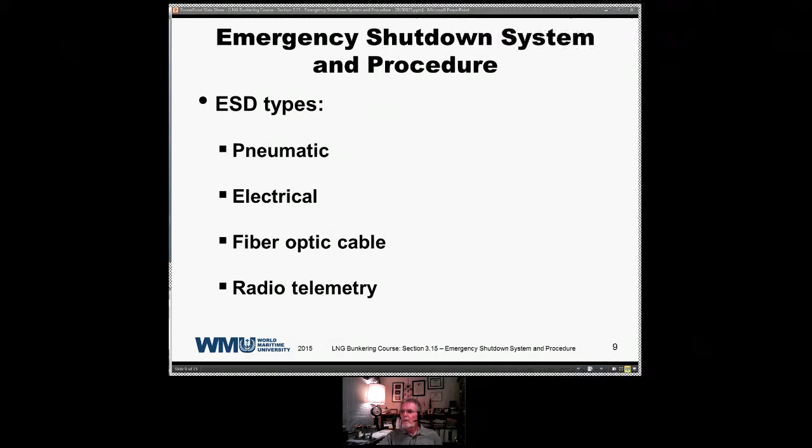Radio telemetry. And we'll explain these as we go along. An ESD can be initiated, as I said, by any out-of-range operating parameter, and this results in a controlled shutdown, placing it in safe mode. This would be the most common type of ESD of the ESDs that are generated.

As I mentioned, very rarely have I seen an actual emergency condition, what would be considered an emergency situation, that would generate an emergency shutdown. Fire being one of those examples, a true emergency situation.

An ESD should and will be initiated by the following emergencies. Again, we use this term in a very, very loose manner, but emergencies are one thing, out of operating parameters are another.

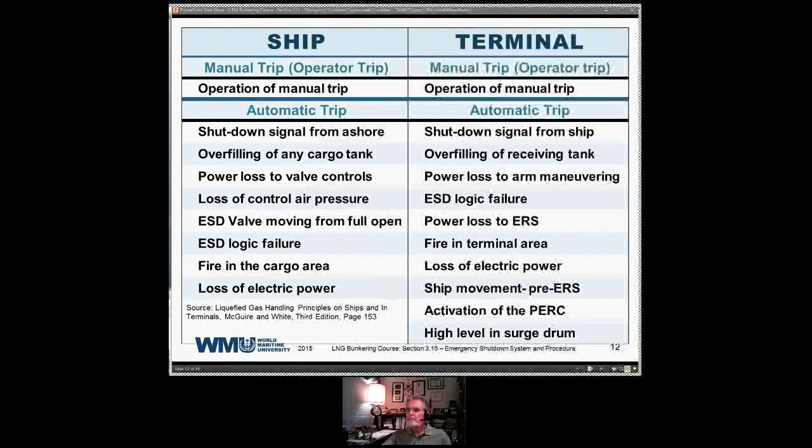The ESD should initiate the following immediate actions. On board, the ship sends out the shutdown signal to shore, so you get the shutdown on shore, and vice versa on the terminal, if the signal is sent via the ship shore link ESD system. Trips of the ship's cargo and spray pumps are going to trip your loading pumps on shore. It's going to open spill back valves or kickback valves on the shore side. These are valves that are automatically activated in the case of an emergency shutdown, and they're designed into the system so that any pressure surges are totally eliminated.

Trip of any type of booster pumps on LPG carriers, they will also interact with the terminal side and create a shutdown with ESD valves. The ESD system also covers the vapor return system. When an LNG carrier is in a terminal loading LNG, putting liquid into the tank, you're also displacing vapor in that tank from the ship to the shore. And this transfer of vapor is done with a compressor unit, and with an ESD you're also going to stop any transfer of vapor as well as the transfer of liquid. So you can see this relationship. It's a very, very close relationship, and everything is done in tandem.

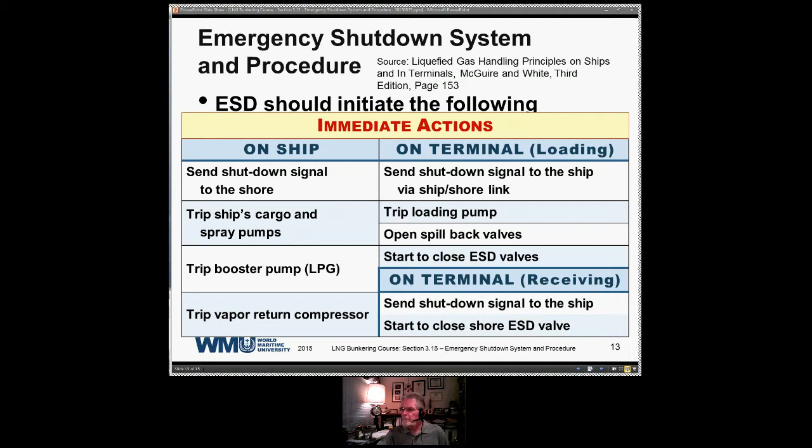The ESD system links historically are well established. There are several companies that manufacture these things. There are some that are more commonly found than others. But the basic designs of the systems are similar, and most of these systems work with each other. It's very, very rare to find a system that is not consistent with the standards.

The interrelationship between systems is basically regulated, if you will. Systems all have to be capable of working with each other, and it's recommended that ship and shore systems link. We'll touch on that in the next section, I believe: different link and non-link systems.

But briefly, a linked system is what gives you that relationship, that marriage relationship, ship and shore, where they're acting as one unit. In an unlinked system, the ship has the capability of generating a shutdown, but the instantaneous capability is not there, and you can wind up with time delays, which could be problematic. So a linked system is the most commonly used system, and this is in all likelihood going to be carried out when we're talking about bunkering operations as well.

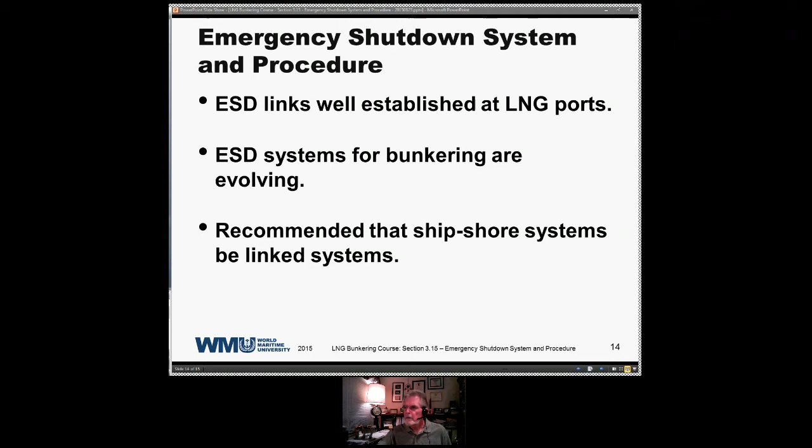I personally believe it's the safest system and the most, if you will, foolproof. It's important that they do the link. I certainly recommend that. The ESD system, once again, places everything into safe mode, and it also can play a part if there happens to be an LNG fire. By shutting everything down, you've now reduced the potential source of fuel for a fire.

You need to know the whats and the hows to gain an effective advantage in any situation. So the ESD system not only tells you that you shut this down, but it also tells you why the system is shut down too, and that's very, very critical. There are thousands of monitoring points within the emergency shutdown system. So if you had a shutdown, which particular item was it that generated the shutdown?

So it's very important to know why the shutdown occurred, and the ESD system is so designed that it will indicate to the operator where the shutdown was generated from and what particular system it was that created the shutdown. And it's important that all parties know the similarities between the vessel and the terminal ESDs.

Going into a new port or a new terminal or a new operation, this would be part of the pre-transfer meeting, asking any questions that the operators may have about the shutdown system on board the ship or the terminal. This information can be discussed and exchanged. One more item that's on the agenda when we have these pre-transfer meetings.

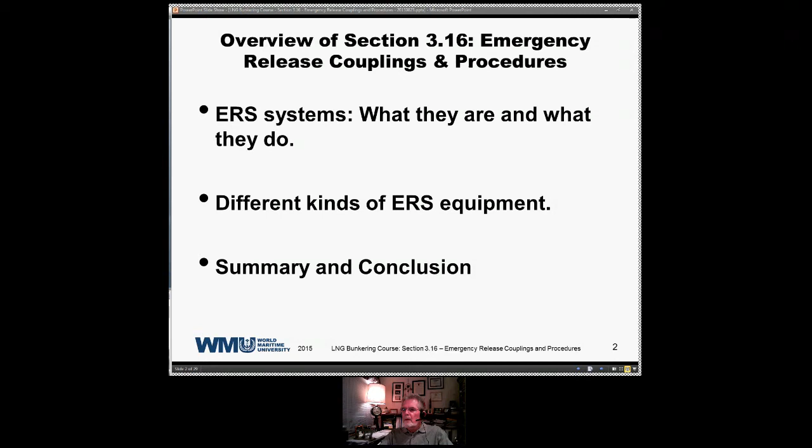The emergency release system provides for safe disconnection of loading arms in the event of excessive vessel movement alongside a berth. For non-mariners, you might say, well, gee whiz, how can this possibly happen? There have been several incidents where an engine has been allowed to go into an underway mode, steam's been admitted into a turbine, and all of a sudden the propeller starts turning. That's one occurrence. A second possibility that we talked about in an earlier segment was a vessel passing close by within a channel at a terminal or in a port.

The dynamics of the water being pushed and the effect that it has on a vessel in a berth can cause a vessel to surge off of the berth. And if the surge is of such a nature where it exceeds the limits, the arm can be damaged, so the emergency system prevents this type of incident from occurring.

And if there's some other type of an emergency, for instance, let's say some type of a casualty at a terminal or in a bunkering operation that necessitated the departure of the receiving vessel from the berth in a rapid manner. Regulations require that an LNG carrier be capable of departing a berth in 30 minutes. Very, very short period of time when you're talking movement of the vessel from the berth. So the vessel has to be ready to get underway at all times.

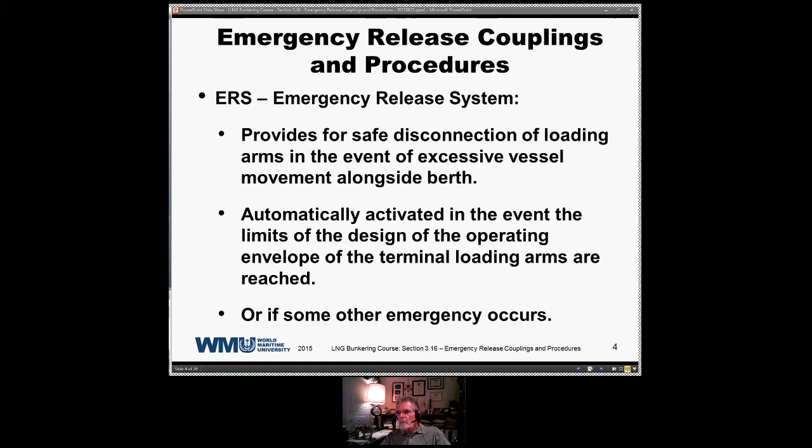The ERS is a special connection, and it's fitted to the normal means of a loading arm connection. Your normal means of connecting a loading arm to a manifold or a hose to a manifold is a bolted flange. Depending upon the diameter of the flange, that will ascertain the number of bolts that are used. The larger the flange, the more bolts.

You also have quick connect, quick disconnect valves, which are also commonly referred to as cam locks, the hydraulically operated or mechanically operated locking device that grasps the face of the flange and pulls the hose or the arm and the ship's manifold flange together in a tight fit.

The system incorporates instrumentation to monitor the ship's position. The emergency release system is a system independent of the ESD system in the sense that the monitoring is done by a separate logic cabinet, a separate electrical cabinet, etc. But it's integrated with the ESD system, so that if there's any type of movement that exceeds certain parameters, an emergency shutdown is going to be generated prior to any automatic disconnection of the emergency release system. So these two systems work closely together, but they are two separate systems.

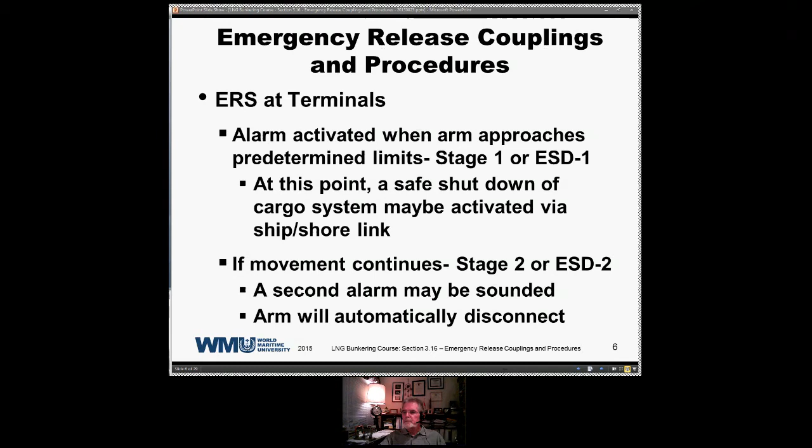The emergency release system is fitted on the lower extremity of the loading arm, and it consists of a flange coupling that's locked hydraulically, and that flange coupling is flanked very, very closely by two valves, two ball valves, or two butterfly valves adjacent to the actual coupling.

Those valves are as close as possible to the coupling because you want to minimize any amount of LNG spillage when the coupling is released. You are going to get a release of LNG into the environment when one of these systems is activated. It's inevitable, but the systems are so designed that the amount of release is going to be minimized.

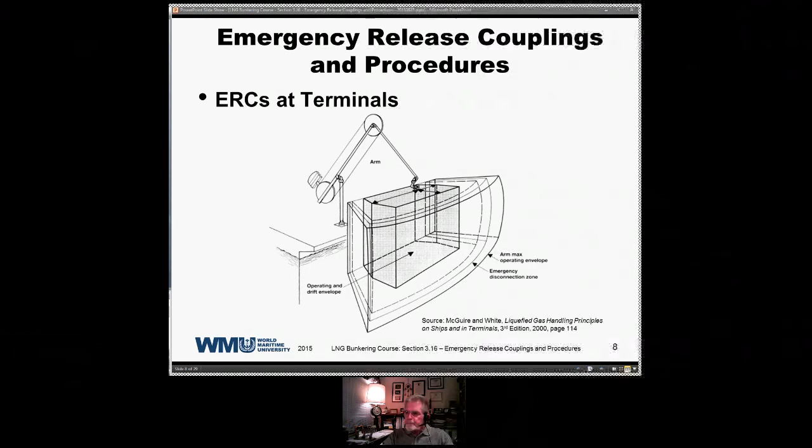This section of the loading arm will remain connected to the ship, and this section of the arm will let the loading arm fall backwards. There's a counterweight on the arm, very, very large devices. So once this connection is broken, this section of the arm will raise, drawn back away from the ship. So no potential damage done to the arm or to the ship.

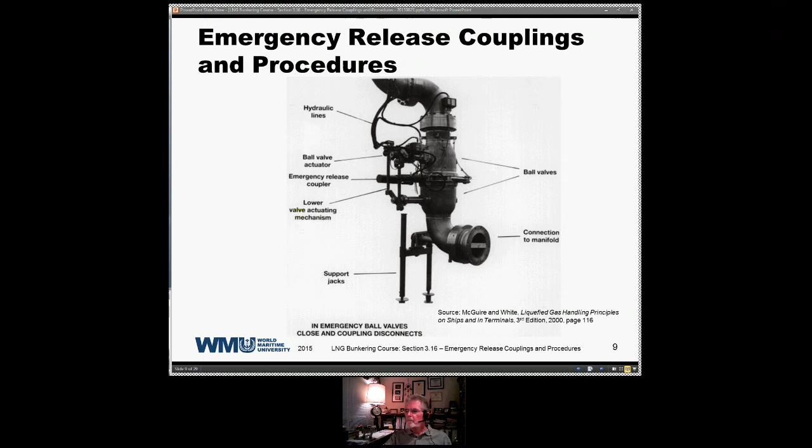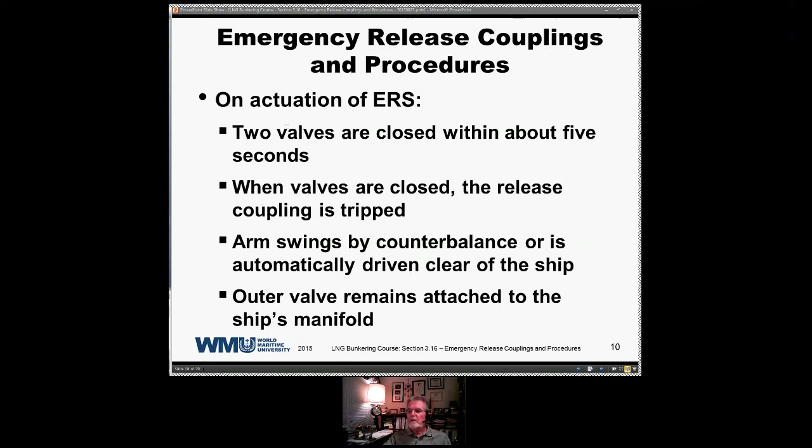The arm swings by counterbalance, or it is automatically driven clear of the ship, and the outer valve, the loading arm and valve, remains attached to the ship's manifold. So that's the operation of the PERC valve, powered emergency release coupling. In a hose arrangement, we have something that's going to be a little bit different.

Okay, I'm going to back up. The operation I'm currently involved with, we do ship-to-ship transfers, and we use hoses. In our particular operation, we do have a specially designed emergency release coupling valve. It's a valve arrangement. It's driven hydraulically, and it's activated by a physical connection between two ships. And it's very similar in its function and application to the emergency release coupling that you find on loading arms.

What we're finding in bunkering operations, particularly bunkering operations where tanker trucks are used, we don't have this powered emergency coupling, but what has been used in place of it is what's called a breakaway coupling. I did touch upon this briefly in one of the earlier sections. We had a picture of a breakaway coupling. It's a designed weak point in the system. The bolts have a breaking stress.

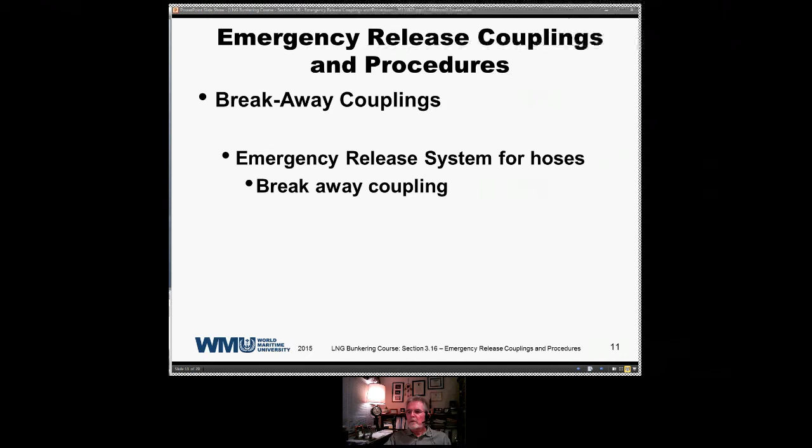There's one on each hose, the breakaway coupling on the receiving ship's manifold, and it ensures the hose does not break in case of marine movement or emergency. The coupling is the weakest part of the bunker hose connection by design. It's designed this way intentionally.

On either side of that breakaway coupling are two quick closing shutoff valves. They close immediately upon breakaway, minimizing the amount of LNG trapped in the shutoff, which minimizes the amount of liquid that's in the environment. That small amount of LNG, when it's in the ambient environment, immediately vaporizes. In most cases, testing of these devices, the amount of LNG is so small that it never even has a chance to touch the ground or the surface below the breakaway coupling. It vaporizes so quickly, and it's of such a small quantity.

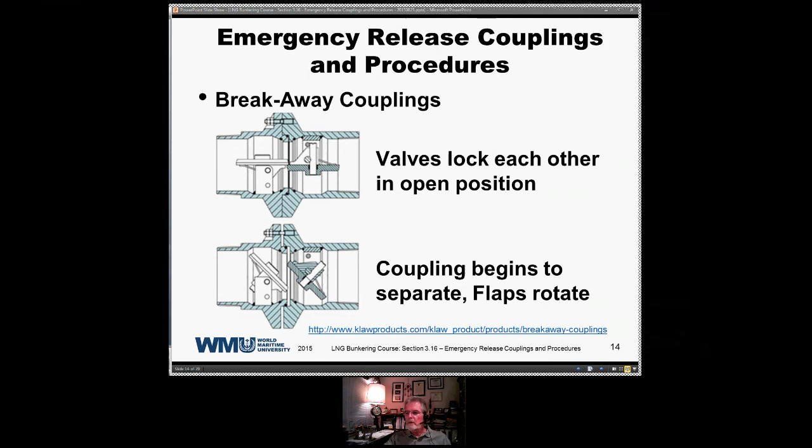This particular design is from a company called Klaw. As I mentioned earlier, we're not endorsing any manufacturers. From the information that was readily available to us, Klaw is one of the companies that does manufacture this type. There are other companies out there. Their designs are going to be similar, in most cases all a little bit different, so that patents aren't infringed upon, things of that nature. But they all serve the same purpose, and they all act in a similar manner.

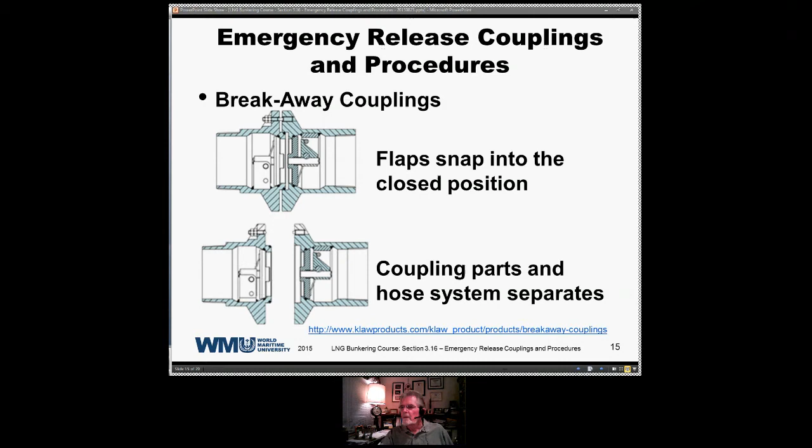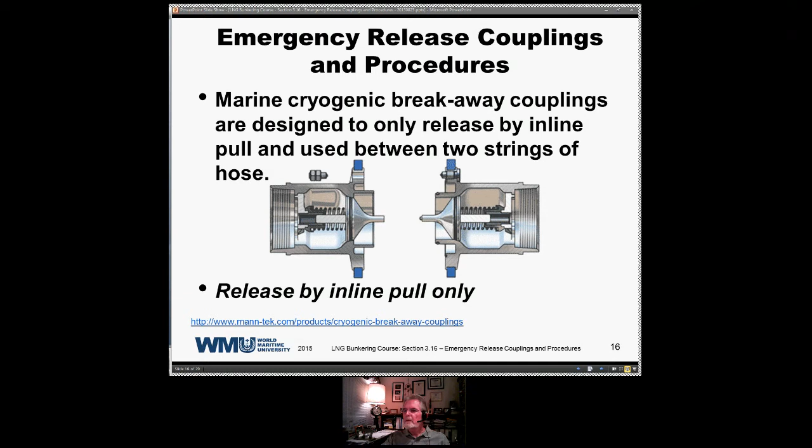Obviously, you don't want to be standing next to one of these things. I'm not minimizing LNG. Any release is an incident that has to be documented and explained. But it is such a small amount that usually it's not a problem. But you would not want to stand directly next to one of these things when it breaks. The following slides are examples of how breakaway couplings are installed to protect the hose.

All right, this is another type of breakaway coupling. With this particular type of unit, hose would be connected on this side, and hose connected on this side. Here's your flange face right here, and these are the weak bolts. Again, it's going to be a lateral force, a force of direct pull, that would cause these bolts to break. Bolts, once again, are designed to break at a lower force than is required to damage the hose.

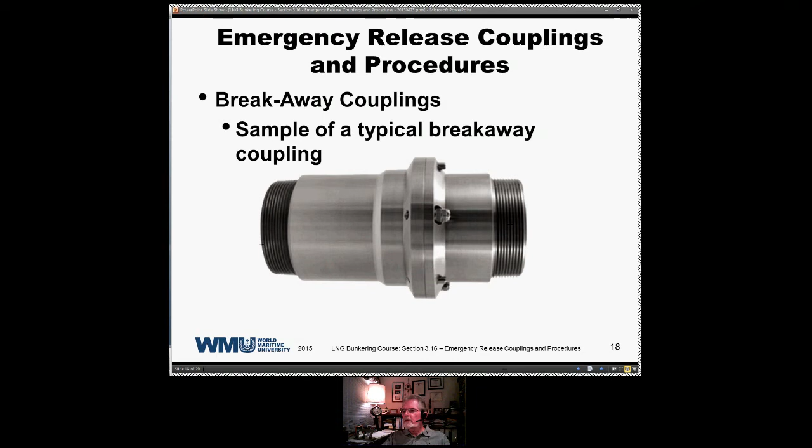All right, here's the installation of one of these hoses, and rather than being in a vertical alignment, in this particular case it's in a horizontal alignment. Once again, you have a lateral force direction, a force in this direction, that would be required for it to fail. In this particular one, right here is the breakaway coupling, with a flange on this end and a flange on this end, which connects.

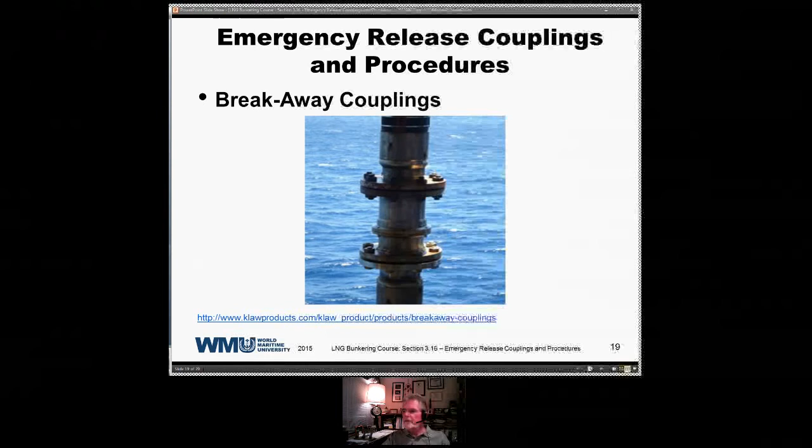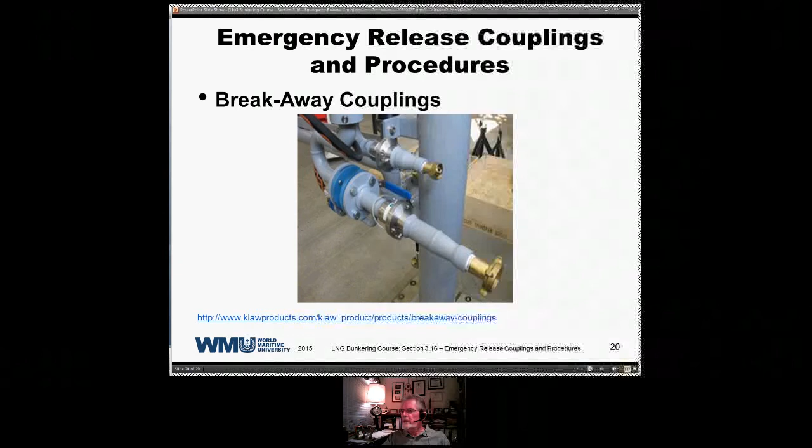There's one on a smaller supply line. This in all probability would be a nitrogen line, something like that for liquid nitrogen. But again, the concept is the same. Here's another one. This is a connection to a supply line. This, I suspect, is an oil line, an MDO, MGO line. The function is the same.

This is the breakaway coupling right here. The vessel moves away from the berth, force is applied in this direction, and the failure is going to occur here. There are valves inside on each side. These valves are going to close, and this breakaway could be conducted with a minimum amount of spillage and no damage to the hose.

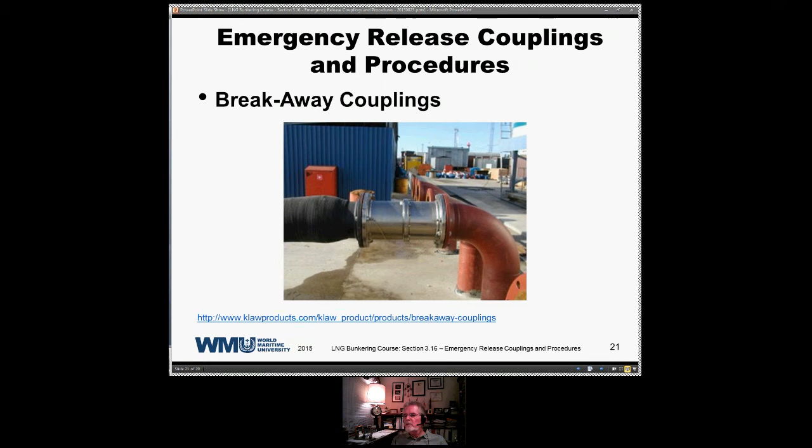This is a cryogenic arrangement, as you can tell by the buildup of ice. Again, this is the breakaway coupling right here, and these are the bolts.

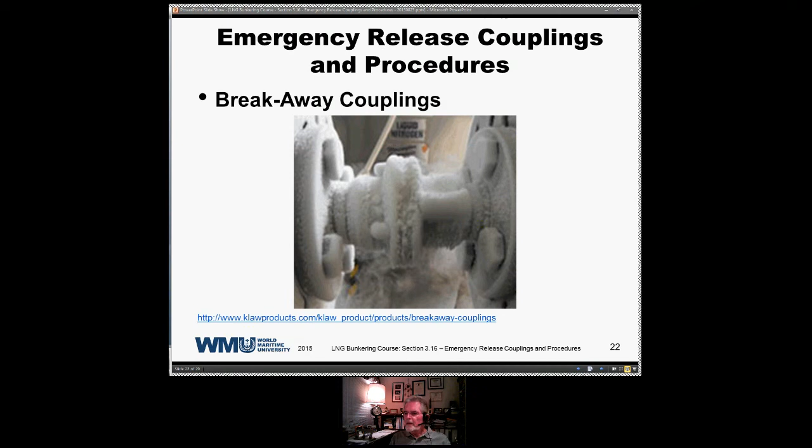Another means of connection, and these are the hard connections to the ship's manifold. Names are similar, so be sure you know the difference. We've just gone over the breakaway coupling, and then you have what are called dry disconnect coupling, dry break coupling, dry disconnect or dry break coupling. And this type of a coupling is for the actual connection hose manifold. They provide quick connect, quick disconnect capability, and they're designed for connecting the supplier and the receiver manifold.

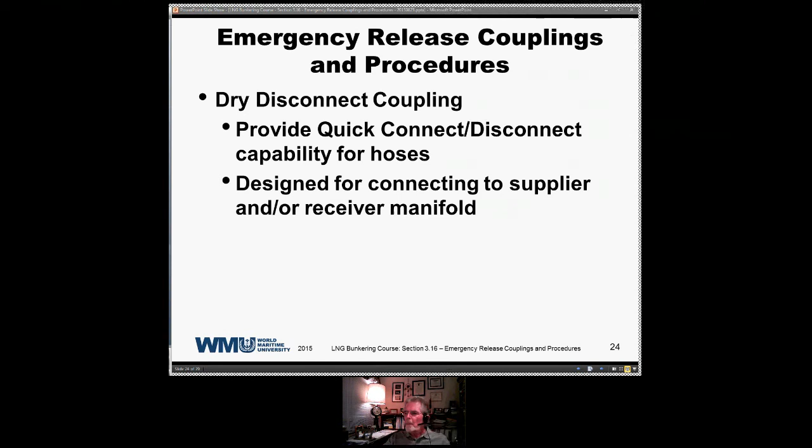The dry disconnect coupling connects the hose to the manifold, and it's an automatic turn and lock mechanism. Has a built-in swivel, removes the hose twist and tension on the hose, and there's an automatic valve opening and closure that delivers non-spill efficiency.